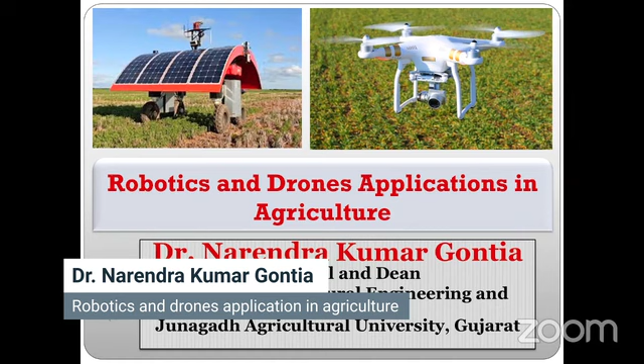Please proceed. So today I'm to talk about robotics and drones applications in agriculture. I'm Dr. Narendra Kumar Gontia, Dean and Agriculture Engineering Faculty at Junagadh Agriculture University.

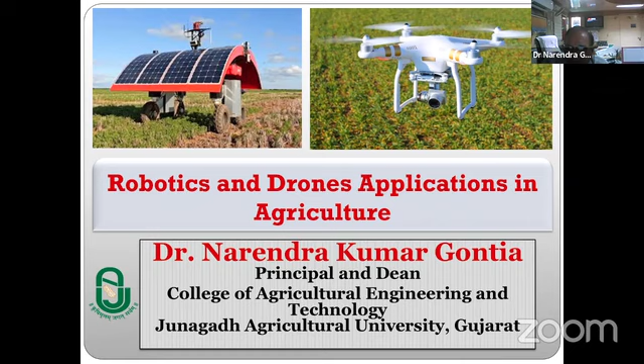Why do we need these technologies in agriculture? The major reason is labor problems, which are increasing. Even when labor is available at the village level, they are not ready to work in agriculture because of the hardship and drudgery involved. That's why, if we want to retain youths in agriculture, mechanization is a must. It should be equipped with technology and devices available nowadays across the globe.

So many intensive operations are there in agriculture, like sowing, interculturing, irrigation, harvesting, and post-harvesting. Even in interculturing, there's spraying of fertilizers, pesticides, weedicides, and all these operations. Any operation you take needs a lot of drudgery and effort from the farmer or labor. That's why labor is migrating, though the total number of laborers is increasing in India.

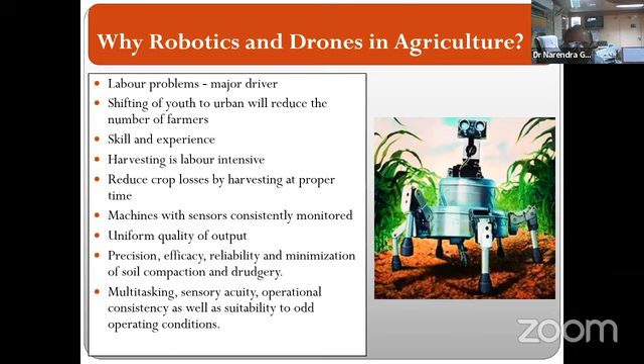What happens actually is the rural labor which migrates to urban areas lives in slums only, and their standard of living reduces drastically. If they get affected by the surroundings, then rising crimes and other issues increase.

If you see the robotics potential in agriculture, these are the areas where robotics can work: autonomous mowing, pruning, seeding, planting, sorting and packing, monitoring, scouting, thinning, milking robots, cultivation, tractors, irrigation, crop monitoring, weed control, harvesting and picking. Almost all aspects of agriculture have potential for robotics.

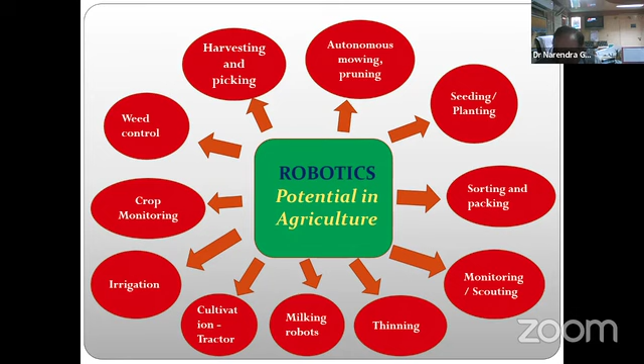And slowly they are substituting labor in Western countries. So why not in Indian agriculture also? In future, I am saying these things will percolate into Indian agriculture also. It may not be as fast as what is going on in Western countries, but it will percolate into Indian agriculture also.

Now, what are robots? Robotics is the branch of technology that deals with the design, construction, operation, structural depositions, manufacture, and application of robots. The robots are designed or integrated with a specific task in mind, tailored to meet the unique needs of that task.

Suppose, as I'm showing in these photographs, these are robots designed for interculturing operations. They are trained for a particular crop, the main or major crop; whatever other plants are available are considered as weeds, and the robot will do its exercise, picking out the weeds and performing the weeding operations.

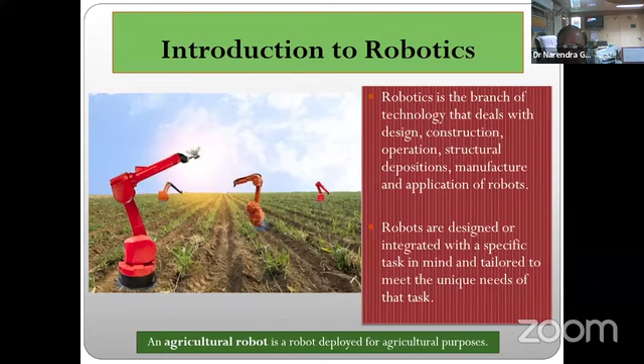So these are some of the agriculture purposes where robots are used in different ways. Now, how do harvesting robots work?

There are different robots, as I told you - one is for weeding. The fruit harvester robot is able to locate and pick ripe fruits. Particularly in horticultural crops, height is a problem - the person has to go up on the tree, and there are certain problems, including the possibility of damage to the person.

These robots are easy to utilize, and they will pick up only the particular ripened fruits. They are trained in such a way that they identify fruits by color and texture, recognizing which fruits are ripened, and then they pick those up.

Using the four-fingered prosthetic hand, the robot locates a fruit, opens the fingers, and takes hold of it. The robot balances pulling, bending, and torsion movements to detach the fruit. These are the different operations possible from such robots: it can pull, bend, use torsion movements, or detach the fruit using any of these forces.

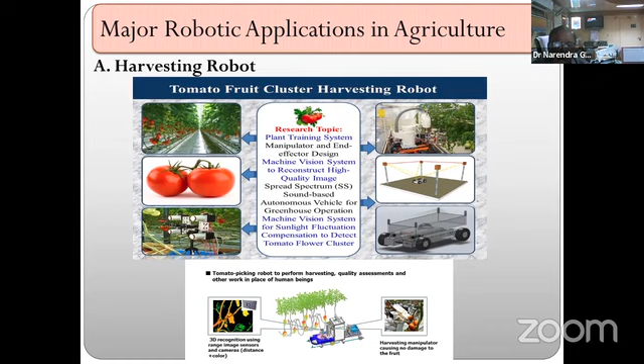Major robot applications include plant training systems and machine vision systems for sunlight fluctuation compensation, to detect tomato flower clusters and similar tasks. These are the different robotic systems generally used nowadays in advanced agricultural farming in Western countries.

Tomato fruit cluster harvesting, for example, is used generally in Japan. Because tomatoes grow in clusters, individual tomatoes are not detached, but the whole cluster is detached from the plant and taken. In the example shown, the whole cluster is taken up, and then the ripened fruits are taken from there.

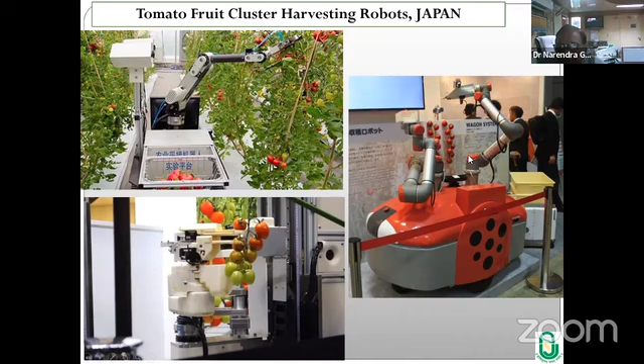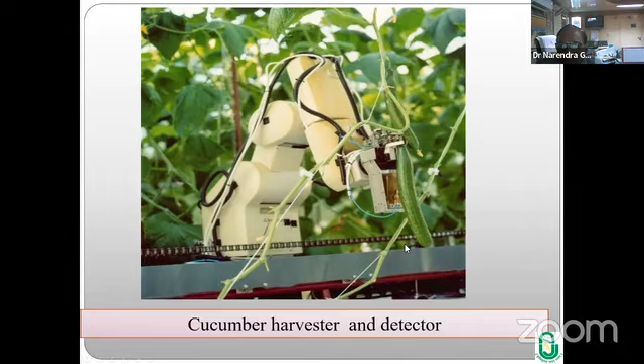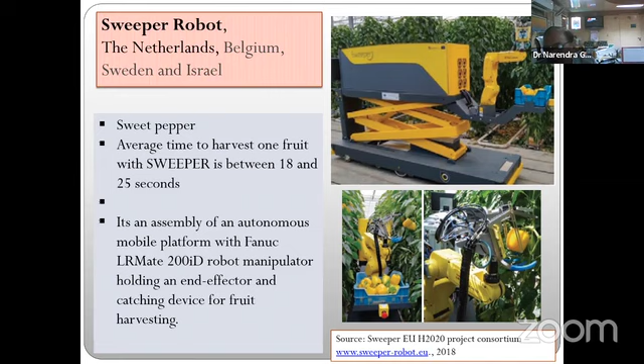It's an assembly of an autonomous mobile platform with a robot manipulator holding an end effector and catching devices for fruit harvesting. These are different devices used for the harvesting purpose.

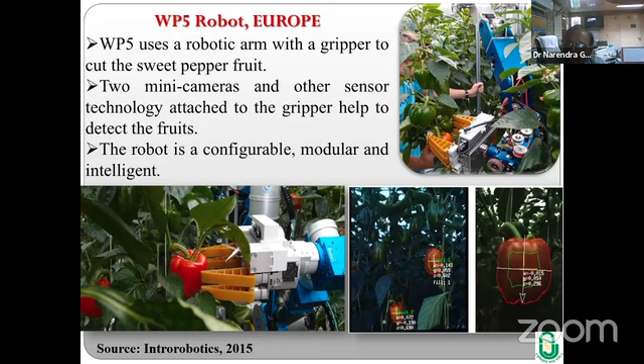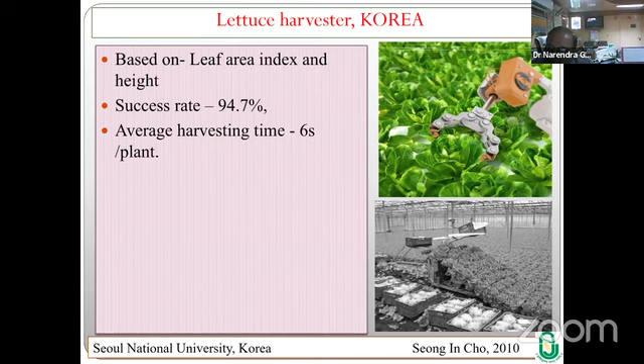These are another type of robot based on leaf area index and height, used in Korea. Such types of robots are used mainly for leafy vegetables, harvesting in 6 seconds per plant. As we know, the better the leaf area index, the better the plant. So leaf area index type robots are used for leafy vegetable harvesting and are useful for such technologies.

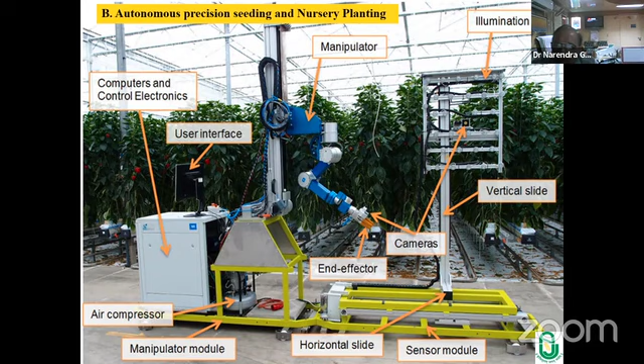Then there's autonomous precision seeding and nursery planting - another area where robotics are used, with a manipulator and illumination and vertical slide, and computers and control electronics to control such robots. A nursery can be totally managed by such robots, and with minimum labor requirement, we can manage bigger nurseries.

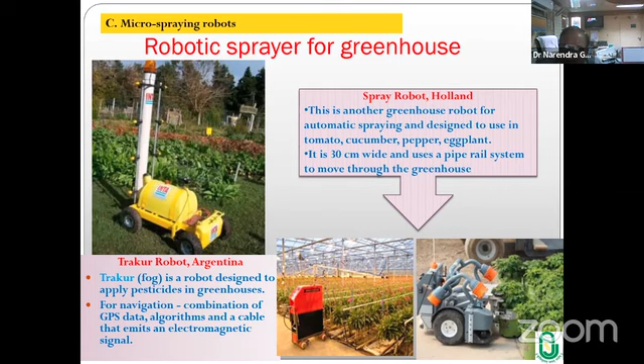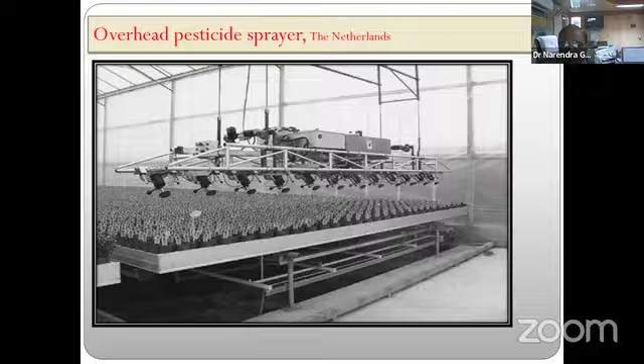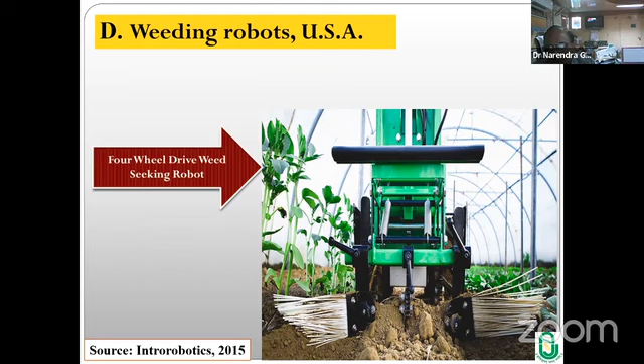Then weeding robots, as shown earlier. There are two types of weeding robots - for example, the four wheel drive weed seeking robot, which can go for tillage operations. It works in two ways: one side it uproots the weeds, on the other it pulls soil towards the roots of the plant we want to grow in that area. This is another operation possible through robots - weeding operation.

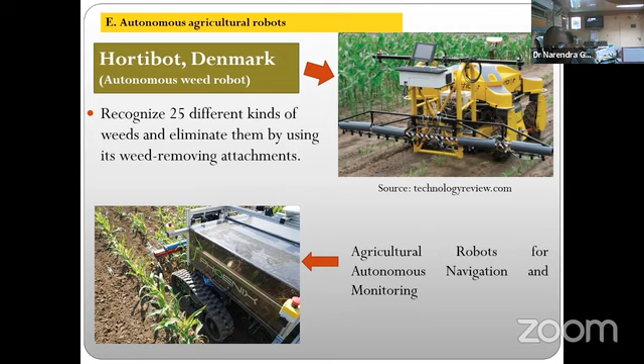Hortibot in Denmark, horticulture people, are utilizing such robots that recognize 25 different kinds of weeds and eliminate them using weed removing attachments. We have to train such robots for those plants, around 25 plants at present level, though in future this can increase. Such robots can pick up weeds and perform better weeding operations, providing a better environment for major crops to grow.

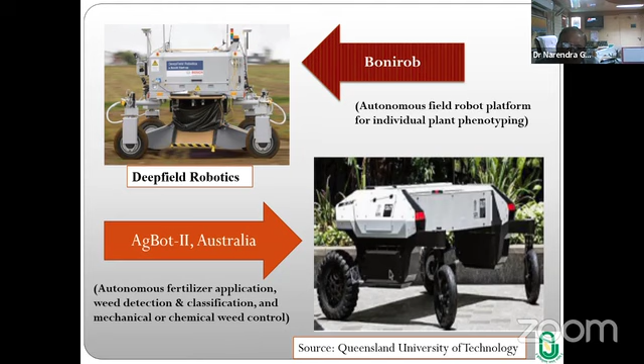This is another AgBot II, in Australia, it is used as an autonomous field robot platform for individual plant phenotyping. This autonomous fertilizer application, weed detection and classification, and mechanical or chemical weed control, this is used for several operations. So such type of AgBot, they are used in Australia, where they can perform multiple operations as you modulate them.

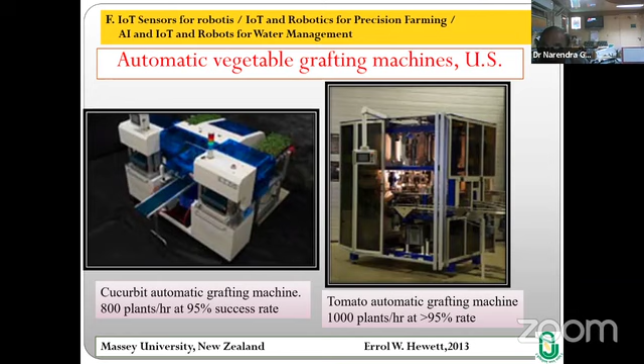Automatic vegetable grafting machines. Grafting is another area which requires not only labor but also precision. Earlier grafting was done only in trees and shrubs, but slowly now grafting is used for small vegetables even, which is very precise. These automatic vegetable grafting machines are also small robots. They have 95% success rate, better than human efficiency. After grafting, we get better production of vegetables, particularly those grown in India like brinjal and tomato, and these can be grafted.

Watering robots. Watering is another specific requirement, particularly when plants are grown in a controlled environment. Applying water to each plant is a very specific requirement. We do use drip irrigation or sprinkling, or robots can be used where the robot can apply water to each and every pot as per the requirement of the plant. So these robots have both capabilities - they judge the requirement of the plant and then supply the water.

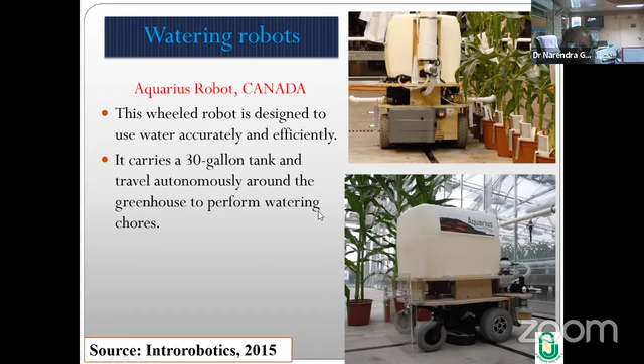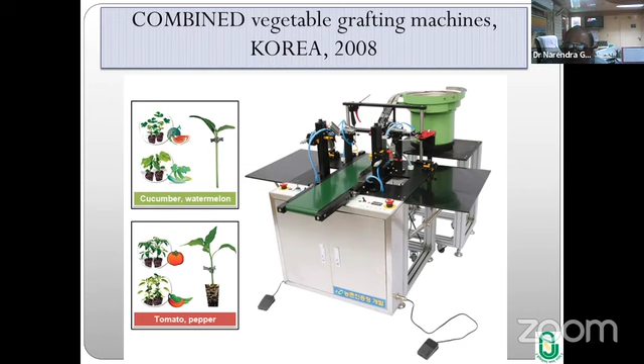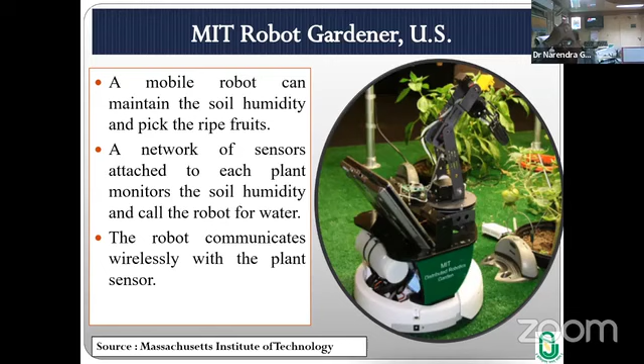MIT Robot Gardener in United States - a mobile robot can maintain the soil humidity and pick the ripe fruits. A network of sensors attached to each plant monitors the soil humidity and calls the robot for water. The robot communicates wirelessly with the plant sensors. So every robot, as I told, is equipped with several types of sensors and devices as per the requirement, and it does the specific work. That is the only problem - each and every robot has its specific work only, you cannot use it for other work.

Slowly, multitask robots are also being developed. As I showed in Australia, they are using multitask robots also, but these are very costly machines, and they can do specific works only. So though it's replacing labor, the cost is more. Naturally, till now they are mainly used in controlled environment agriculture, where it is grown in greenhouses or net houses or vertical farming. There the robots are introduced at the first level.

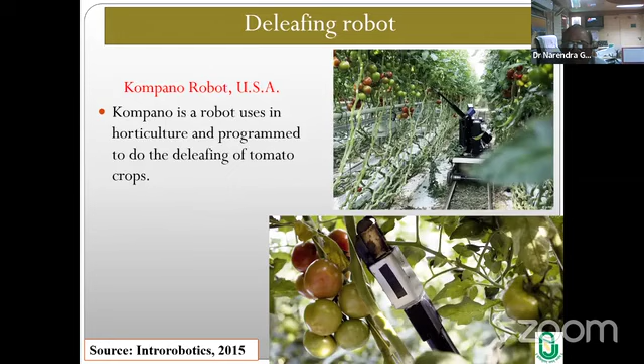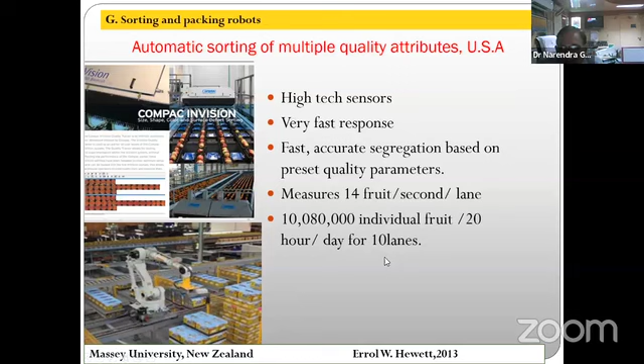Automatic sorting of multiple quality attributes. This is also a plant in USA where high-tech sensors give very fast response, and fast accurate segregation based on preset quality parameters. It measures 14 fruit per second per lane - this is its capacity, very high capacity. It may replace even 10 to 15 laborers if done manually. So for such high numbers of fruits, in crores of fruits, individual fruit per 20 hours per day for 10 lanes, they can perform the operations.

Then packing robots. As I told, a robot has its own utility in all aspects. Till now we have seen robots used in plant thinning, plant weeding, plant interculturing operations, or irrigation or harvesting and like that. Now there are few robots used in post-harvest operations. After harvesting the plants, there are so many operations required where labor and precision are needed. We can use robots, and in India, robots are coming faster in the processing industry than in nurturing the plants. I think this is the area where robots are coming faster in comparison to field work.

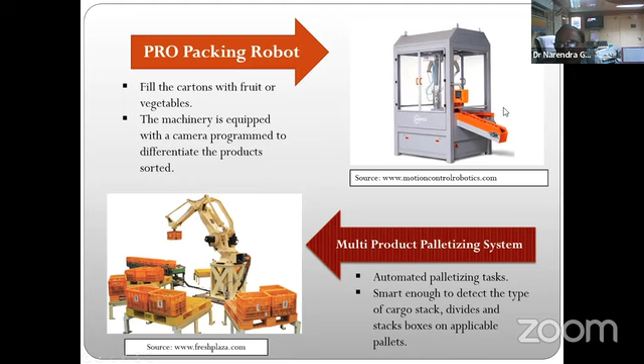So these are the packaging robots. You might have seen packaging machines nowadays available in the market also. Those machines are equipped with robots now for more precise work, with camera programming and different types of images they can take - packaging is not only simple packaging. Suppose there are three types of apples - one may be green, one a mix of green and yellowish, and some brown. They can pick according to color and texture, fill up different packets, and sort out the packets also. Automated palletizing tasks can be done, smart enough to detect the type of cargo stack, divide and stack boxes on applicable pallets. All this work a robot can do, replacing a lot of labor from that area with better efficiency.

Bee robots. This is another area where we are using so much pesticides and weedicides, and bees, as we know, are friends of agricultural operations. But one operation, the spraying of pesticides particularly for the plants, harms the bees that help in propagation. So those bees die because of too much use of pesticides and fertilizers in the area. Now the bee population is reduced, and somewhere there are almost no bees available in that area.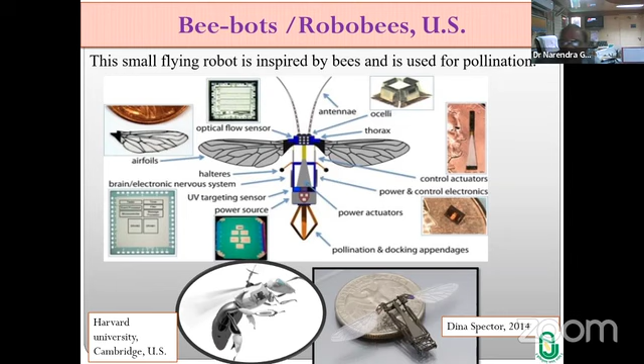So bees are manufactured now. This small flying robot is inspired by bees and used for pollination of different plants for propagation. This is another area where, due to human problems or due to pesticides and other uses, the population of bees is reducing. Now, for a few plants where pollination is possible through bees only, we can use such robots, and they can help farmers go for pollination of such plants.

Self-directed tractor robots. Now, earlier we have seen tractor drivers were replaced, and we have gone for driverless tractors. Now, instead of driverless tractors, tractors are designed which can be operated by robots.

Because with tractors, it's not only the driving. It is slightly different compared to motor vehicles. It's not that you only have to drive the tractor, driverless is not sufficient. We have to take decisions also, how much depth is to be applied, where to take the turn, how much pulverization is required, or where roots are there. If it gets stuck, we have to release some hydraulic systems, and so many decisions as to this. That's why we don't say tractor driver, we say tractor operator, because he has to operate so many functions.

So now tractor robots are available which can operate the tractors. Escorts showed the prototype of India's first electric tractor, the Farmtrac 26E. The 26 horsepower diesel engine tractor is a robot-operated tractor. So in India, it has just been introduced by Escorts.

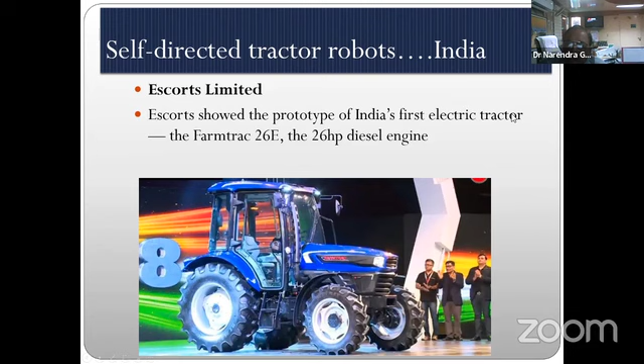Electric automated tractors are also there. Mahindra has given autonomous tractors where a small function is used with robots. It doesn't mean a machine which is big. It can be a device used with the tractor, because as I told, a robot means a device designed which can take its own decision. It can be modulated, it can be trained for certain work. If it is there, that's a robot. It can be equipped with a tractor also, and it can work. Mahindra also has an autonomous tractor, and they have launched it for the first time in India.

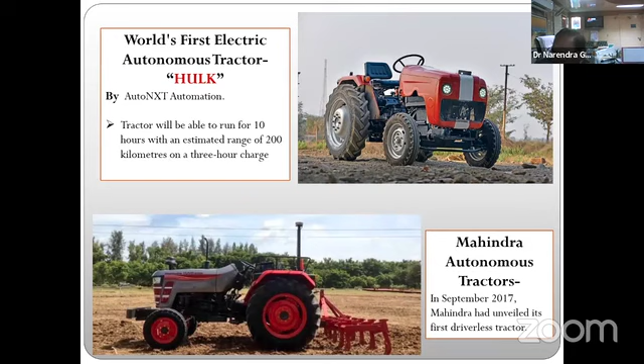Now, till now we have seen about robots. Similarly, drones are also very fast, I think drones are coming faster than robots. Robots came earlier, but they have not penetrated as fast. Drones came late in agriculture, even in other fields, but they are penetrating very fast and being utilized very fast. Their applications are increasing. The reason is drones are not so costly, but they are replacing a lot of labor compared to robots. Very precisely, they can do the work.

When we talk about the agricultural field, soil analysis, widespread seed planting, crop health monitoring and surveillance, spraying of inputs, irrigation and monitoring, crop damage assessment, and livestock tracking - these are a long list where drones can be utilized very easily, and even a small farmer can do this work. Or with contractual farming, some educated youth from the village can purchase a drone and do the work of the whole village or a nearby cluster of villages on a contractual basis. So drone applications are increasing in these areas.

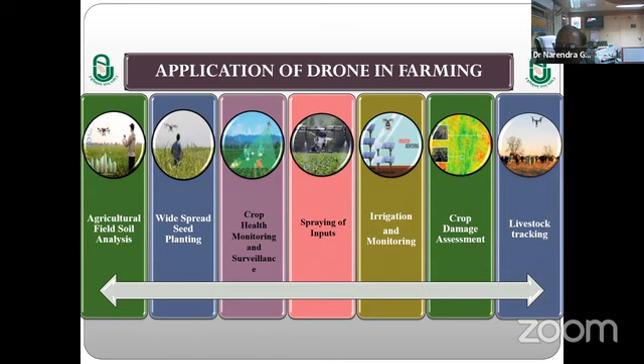Livestock tracking. In India, generally we don't have such requirement. Livestock tracking is used in foreign countries where livestock are on a large scale and one person is managing them. But even where it is required here, we can use it for tracking our livestock, where it is going, and how we have to divert it.

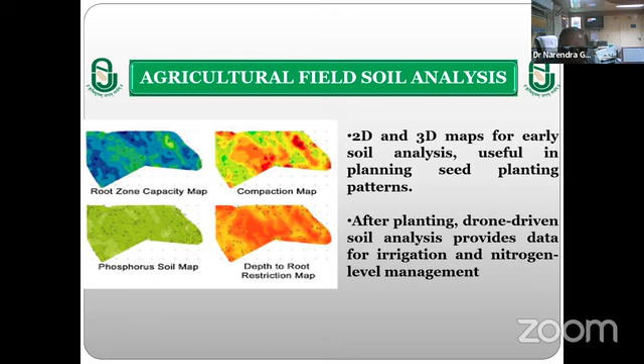This is some operations of agricultural field soil analysis which we did using the drones, and 2D and 3D maps I am showing over here: depth to root zone capacity map, compactness map, phosphorus soil map, depth to root restriction map. These are possible through the drones.

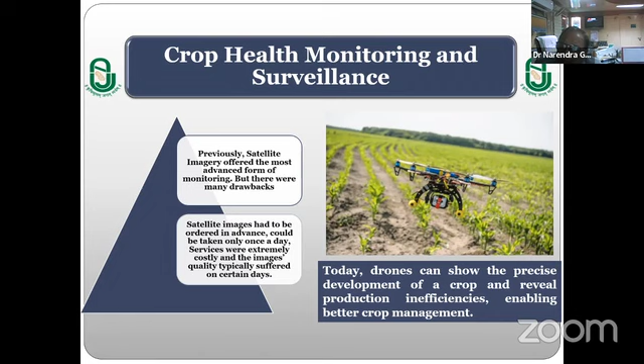Similarly, crop health monitoring and surveillance - such drones, if you have a camera taking images in different bands, it can give you NDVI values, SAVI values, remote sensing. Those who know remote sensing know that with these we can get an idea about the crop, what is the present condition and health of the crop. It can be easily obtained from such remote sensing based cameras, attached as a payload in a drone.

Similarly, crop health monitoring and surveillance using phantom type cameras. Cameras are available with these small drones, with half kg or 1 kg payload capacity, and they can take the images and we can get it out.

Spraying of inputs - for this we need heavy drones which have capacity from 10 liters to 20 liters payload capacity tanks, and we can fill them up.

One thing is the technology is advanced. We have to go advanced in such spraying technology. Naturally we need some nanotechnology based spraying material also, so that in a small quantity we can cover a larger area. So the payload capacity may be less, but it can cover a larger area. That is also a requirement of today's world, that we should go for nanotechnology based materials, which in a small quantity can cover a larger area.

It is not only that we can spray at a faster rate, but we have whole control. We can program these drones on where to spray, where not to spray, how much to spray. We can maintain concentration also - somewhere higher concentration is required where more pests are there, somewhere lower concentration, and somewhere there is no pest so no spraying is needed.

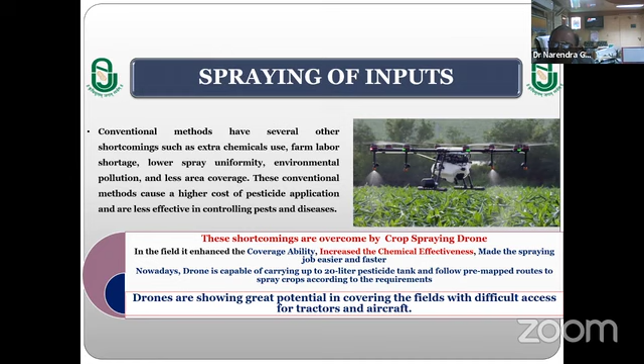All this you can program, and with that program the drone can be piloted and it can work accordingly, and we can save a lot of pesticide. It will not only save cost, but it will save the environment also. Unnecessary pesticide - as I told earlier, bees are dying because of so much pesticide we are throwing on the crops. If we use limited pesticide which cannot affect the environment much, that will be good for human health also, and for the health of other animals also.

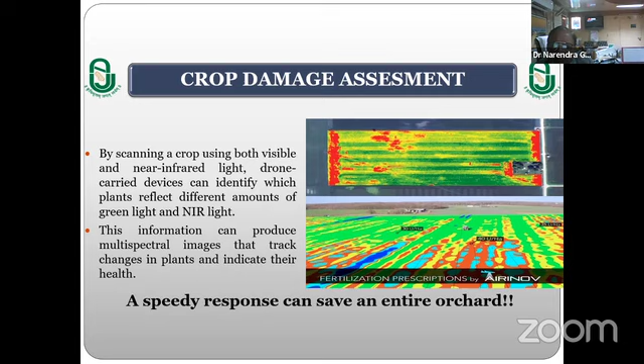Crop damage assessment, as I told, whether it is a flood affected area, a drought affected area, or a cyclone affected area - any type of natural calamity - we can go for assessment of a larger area in very small or limited time. We can track the whole area, get the images, and based on the images we can take the decision of what is the situation in that area.

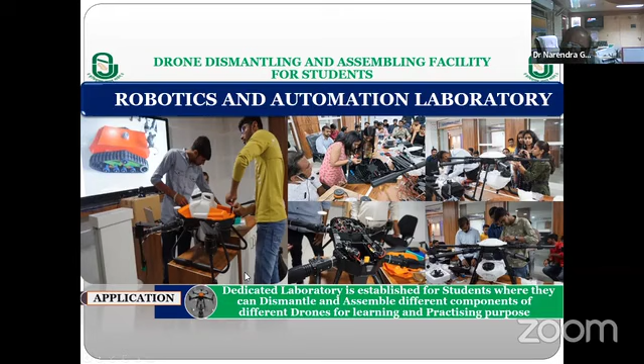So this is something from my college labs. Our students are using the robotics and automation laboratories. They are youngsters trained in these technologies. In the coming 5-10 years, robotics and drone technology will enter into agriculture like anything, and these youngsters who are gaining knowledge of such latest technology will go into the field and help farmers bring automation to agriculture, attracting youth into agriculture so they can do better farming with automation and serve the country.

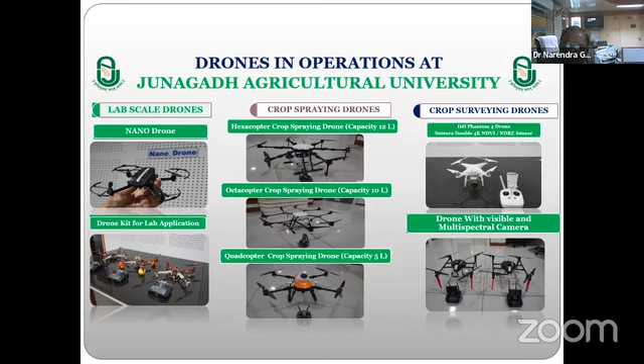These are different small drones for giving pilot training on how to pilot the drones. This is different types of drones used in labs for training students. These are drones used for dismantling, so they can understand the different parts of drones, how drones work, what are the different components, and if there is some problem, how to repair it.

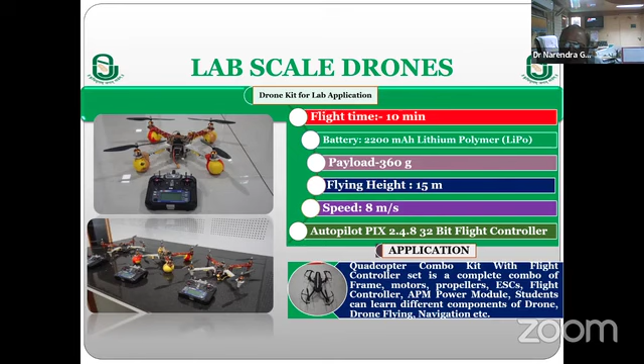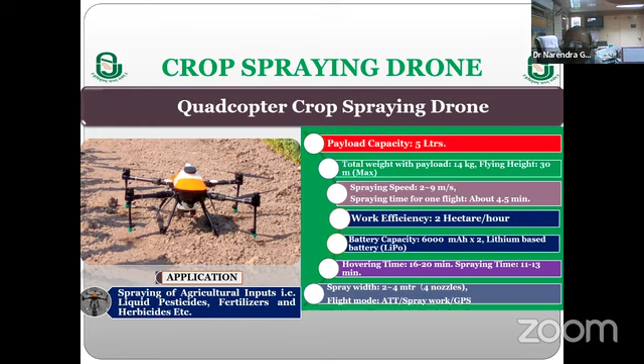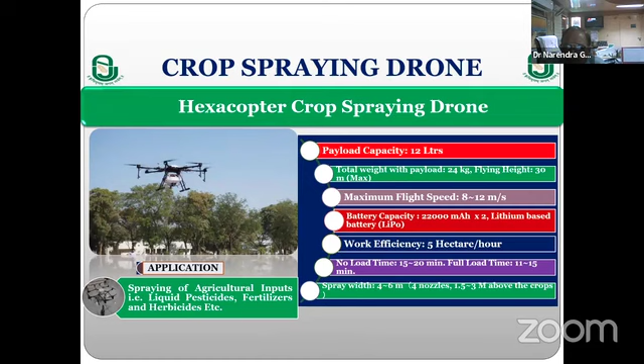Hexacopter - there are several types of drones, with 4 wings, 6 wings, 8 wings, like that. This 6-wing hexacopter drone has a capacity of maybe 10 to 12 liters. There are quadcopters also, with slightly lower capacity, but as you go for higher wings, the stability is better. In comparison to a quadcopter, the hexacopter has better stability, and you can spray properly with this.

DJI Phantom drones - such types of drones are used more for surveillance purposes. They have half to 1 kg payload capacity, so only a camera can be loaded on that, which can take images in different bands, and we can go for surveillance and survey of the area, and take decisions based on this surveillance.

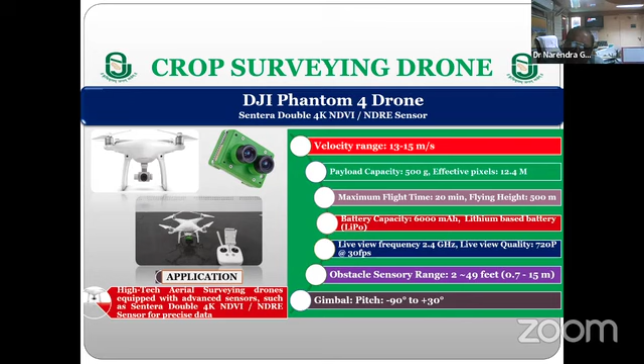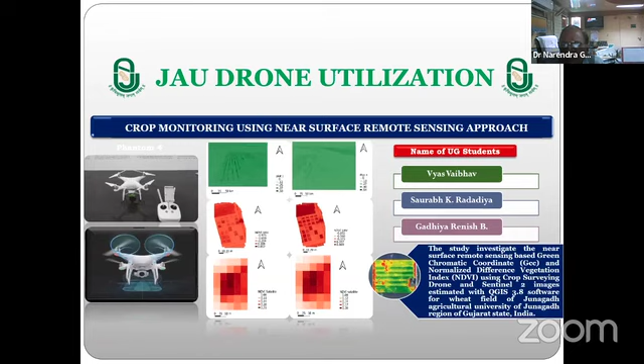The visible and multispectral camera, as I told, is the same thing the students are working on for surveillance, and similar projects done by different students on these aspects.

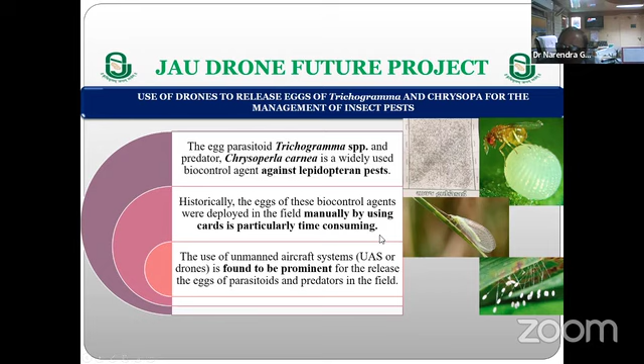So these are the future projects we are doing. It is not only Trichogramma and other things, Chrysoperla, biocontrol against lepidopteran pests - we can use such types of drones and apply different treatments on a particular plant or particular place where we want to use that.

That type of work is going on - laying eggs in such type of reservoirs kept in different places on a field. How to lay the eggs? At present, a person goes and lays the eggs in each trough manually. Now, if we have drones, we can use them for laying eggs in the troughs distributed all along the big fields.

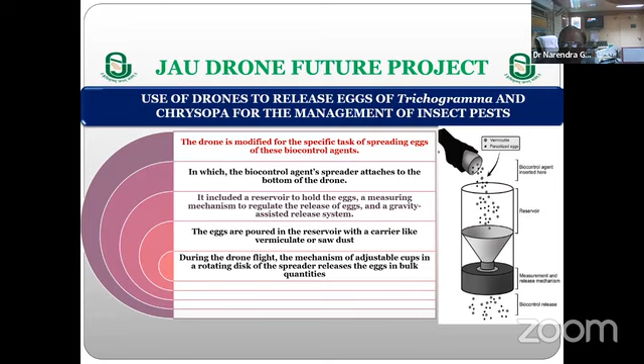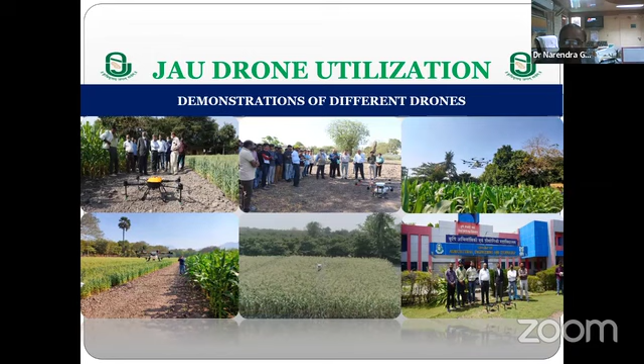So this is all our own experience with the robots and drones that we are using at our College of Agriculture Engineering Technology, Junagadh Agriculture University, Junagadh.